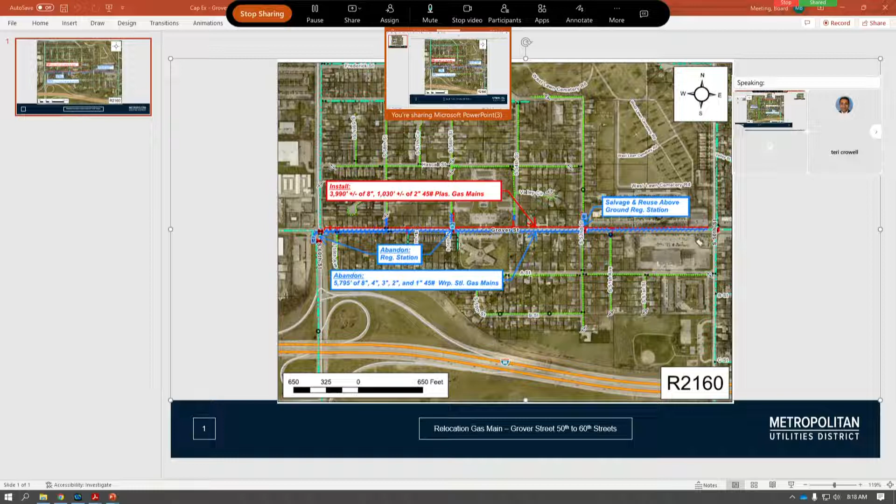The first item is item number 2, on page 2, for $811,800. It's to install 5,020 feet of 2- and 8-inch gas main in Grover Street from 50th to 60th Streets. This work is required to eliminate conflicts with proposed grading, paving, and sewer being done for a City of Omaha project. This work is not reimbursable since it is in public right-of-way. This steel gas main is 60 to 70 years old, and this work will be done by a district crew.

If you look at the picture, you'll see the green dashed lines. The work in this area is to relocate some of the gas meter sets outside so that we can do an uprate to eliminate this medium pressured area. The dashed green lines are where we will be bringing some meters outside. Once we have all those meters outside, we will be doing an uprate that will make that entire area uprated to a 45 PSI pressure.

The uprate will allow us to abandon 3 regulator stations. 2 of those are in conflict with the project itself, and that would save us approximately $250,000 instead of relocating it, by doing this uprate. This will eliminate future maintenance of the regulators, and it will also improve our overall reliability of the gas system out here. One of those regulators is an above-ground regulator station, which we will be recovering and salvaging for reuse at another time.

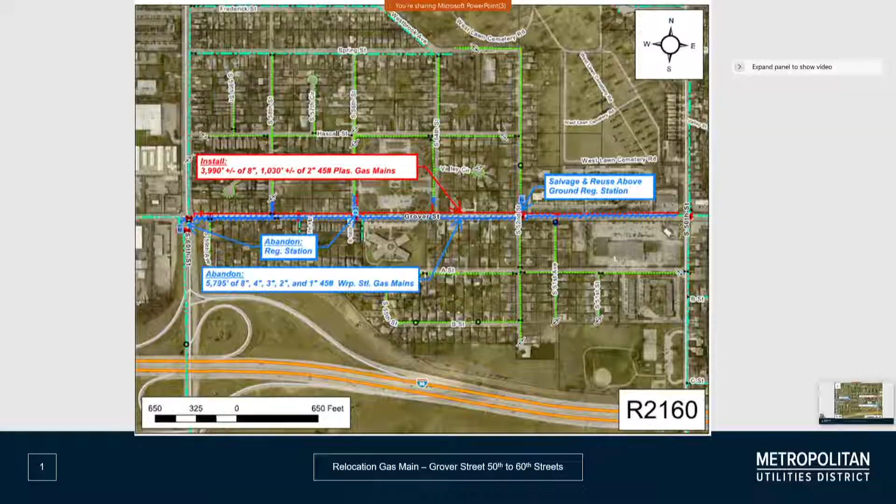The second item I'm going to cover is item number 3, also on page 2, for $104,700. The pilot project is to do a condition assessment of 2,500 feet of 6-inch water mains along 48th Avenue from Spring to Martha Streets, and 2,000 feet of 6-inch water mains along 46th Avenue from Bancroft to Frances Streets, now being shown on the screen.

This pilot project will use the HydraSnake electromagnetic inline inspection technology offered by Pipeline Inspection and Condition Analysis Corporation, or PICA. You've probably heard us talk about that before when we use the SeeSnake technology. It is to evaluate the condition of these water mains.

The assessment will assess a 6-inch cement-lined cast iron main. Both of these were installed in the 1950s. There have been 13 main breaks in these 2 streets, and the last one was in 2018.

This is the same technology as the 12-inch SeeSnake, but it's a smaller tool that is inserted through fire hydrants. That allows us to have less digging and shutdowns, and it results in a lower cost.

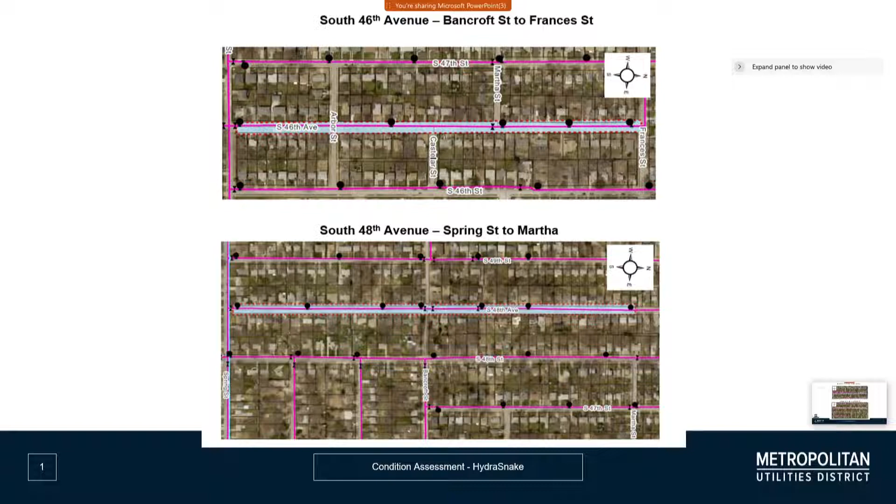This request includes the replacement of 4 obsolete fire hydrants for more reliable insertion and extraction of the tool. The proposed schedule will be in late July to shut down and modify the hydrants, launch and receive the inspection tool, and complete the inspection.

Each run will take about 6 hours. We have been communicating with the customers and will continue to communicate as we go through the project. Work will be done between 9 a.m. and 3 p.m. to minimize customer impacts.

It will take approximately 2 months for us to get an assessment report, and the repair will likely begin in the end of 2022 and the beginning of 2023 to reduce the risk of future main breaks.

Just for general purposes, it's about $23 per foot to do a HydraSnake inspection versus $378 per foot to do a replacement. That doesn't include the cost of where we'll go surgically repair different areas, but it does make a lot of sense for us to continue to do condition assessment and go fix the parts where we need to.

Gina, that sounds really like a great opportunity, great tool. You said 2 months before we get the conditional assessments or whatever. Correct. Are you going to come back to the board and tell us how that did? We do that usually. We can do that at any time, Director McGowan, but we'll also do it when we do our updates of our IR assessment. So if there's a desire for us to come back, we can do that. Absolutely, it's a pilot project.

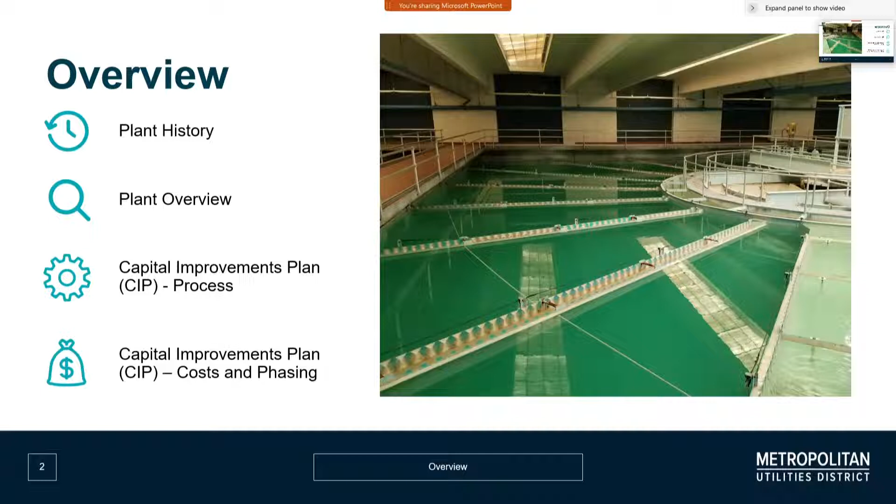So a brief overview, or I guess a brief agenda of what I'm going to talk about regarding Platte South. I'll give a plant history, a brief overview, and then the capital improvement plan process and some of the costs I'll share as well. Next slide, please.

So you see the arrow chart here gives a little plant history. So even though the Platte South is more than 50 years young, it was established a full 70 years after the Florence plant. In addition, after that construction and onlining of the plant itself, the arrow chart highlights some of the plant improvements which have taken place over the plant's current lifespan.

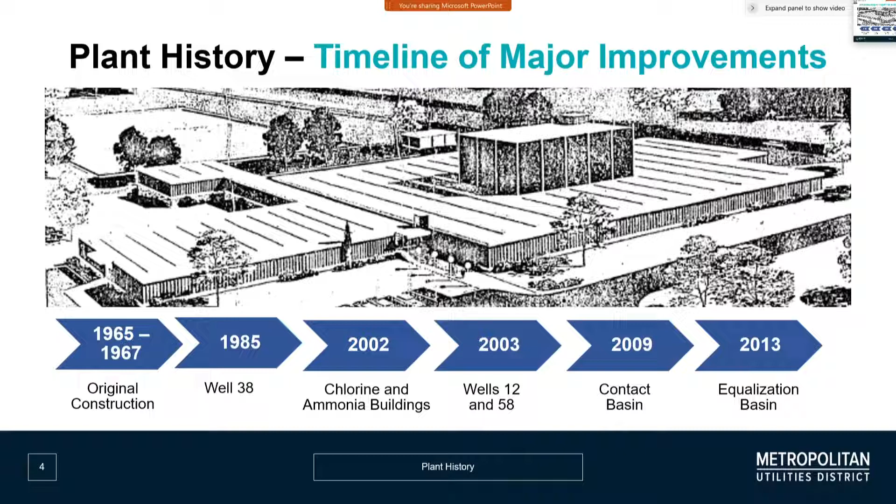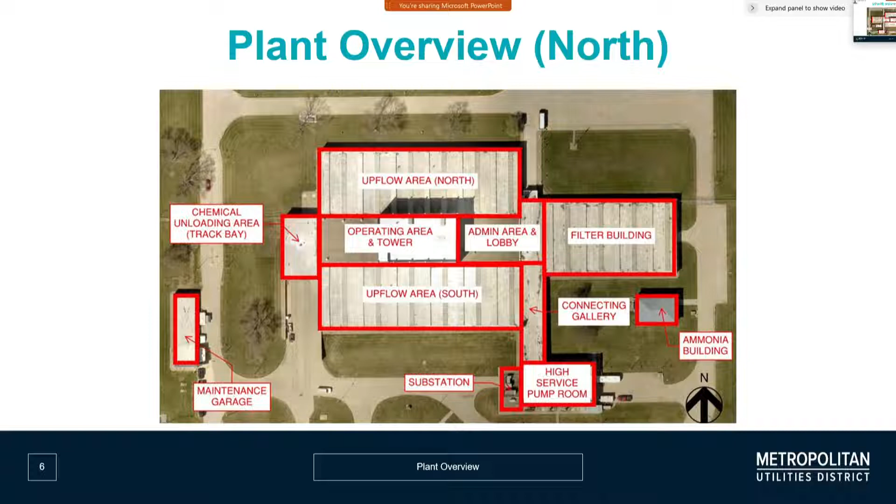So dividing the plant up in a couple of different overview or aerial slides here. The first is the plant overview north. The plant and wellfield consists of approximately 700 acres. The north portion of the plant, with exception of the ammonia building in this picture, are original to the 1960s build. Like the Platte West plant, the Platte South plant is contained under one roof.

So then on the next aerial view here, we can see the south portion of the plant, with exception of the clear well and then the small storage building on the right. Most of those are newer structures in that overview, many of which were related to recent regulatory improvements.

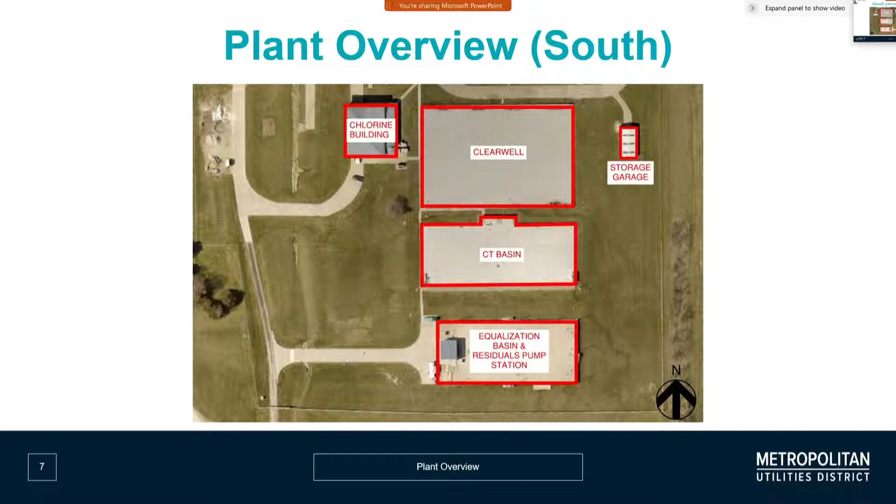So a brief overview of the capital improvements plan process, highlighting some of the evaluations performed. These are just some of the key aspects of it.

The plant was studied for any current or potential bottlenecks. We're exploring any low-hanging fruit for capacity improvements should the need arise.

We also performed a condition assessment, looking at all of the plant's components related to architectural, structural, mechanical, electrical, and process. That assessment was closely done with the plant maintenance staff, as well as our central maintenance division, and incorporated all the equipment history into those evaluations.

One thing to point out is we find, as we do these types of evaluations, that we have a very good maintenance team. We maintain our equipment very well and prolong its life for quite some time.

And kind of teeing up what was discussed in the previous comments from Mr. Doyle and Ms. Langle, even Jeff Skovanek, you're going to hear a lot of those things sprinkled throughout this presentation.

So we also evaluated future flood elevations and impacts of climate change during this study. The process also included any challenges related to the Safe Drinking Water Act and known upcoming EPA regulations.

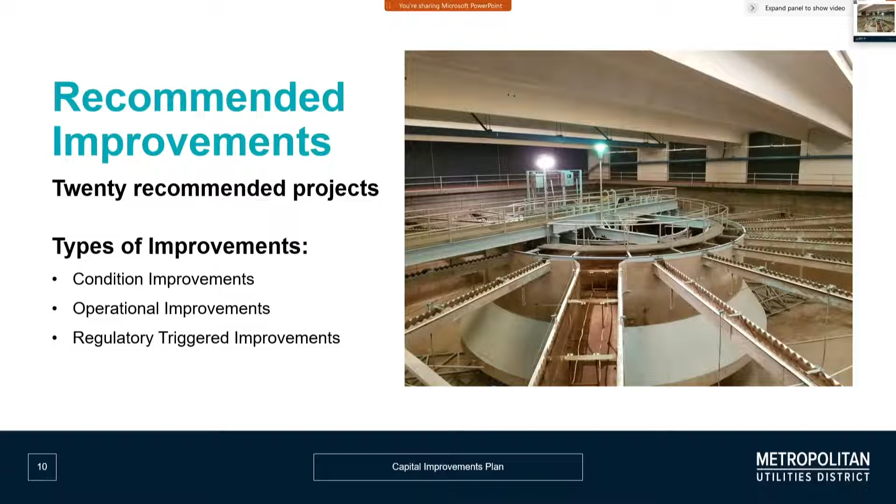So just a quick overview of the capital improvement costs. We've got a total of $136.3 million in 2022 dollars.

Probably the biggest note here, as I mentioned on the previous slide, is that the regulatory triggered improvements will only be initiated once the trigger condition is met.

So as you see the next 10 years, how those costs are spread out - timing of the projects is still being evaluated to meet the district's budgetary needs throughout the entire company. Many of the initial projects are related to condition assessment items critical to plant operation.

An example of that would be the plant's electrical, or the well field's electrical backbone and the electrical service to all the pumps in the well field.

Now I'd like to transition to a brief overview of the Water System Master Plan.

A brief agenda for the last portion of the presentation: a high-level overview of work completed, the prioritized CIP, and the next steps.

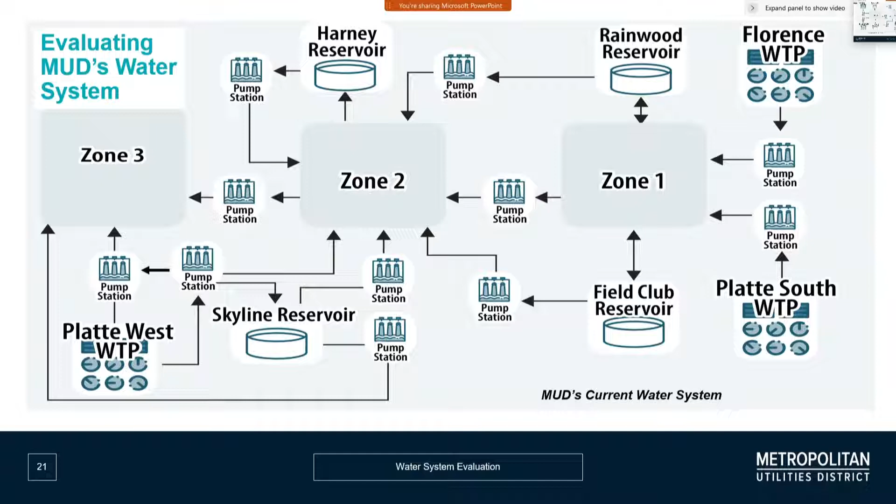So in this schematic, we're showing that the district operates a complex water system designed to deliver peak demand and adequate pressures. This complex system was evaluated using a hydraulic model to project where levels of service criteria would not be met by 2050 due to growing demands. In these areas, improvements would be needed to meet the level of service criteria. When I say level of service, we're establishing minimum pressures, fire flows, those types of things. We hit on the West Dodge pump station, and those types of improvements are what keeps that level of service available for our customers.

Just to touch on the optimization process, HDR subcontracted with a firm that specializes in optimization modeling. The firm's called WCS. That optimization modeling uses a cloud to allow them to run many more scenarios and alternatives than we could traditionally do with our brute force calculations. This allowed our collaborative team to identify a strategy that meets the level of service objectives at the lowest life cycle costs while considering potential future regional customers.

After completing the optimization modeling, we refined our capital improvements through workshops with our consultants. Then we prioritized those improvements, estimated timing for them, and identified triggers so that the plan can be adapted during implementation. So this is a lot of trigger-based improvements—we don't build it until we see the growth coming. Key capital improvements in this document include two storage reservoirs and pump stations out in the southwest and northwest fringes of the service area.

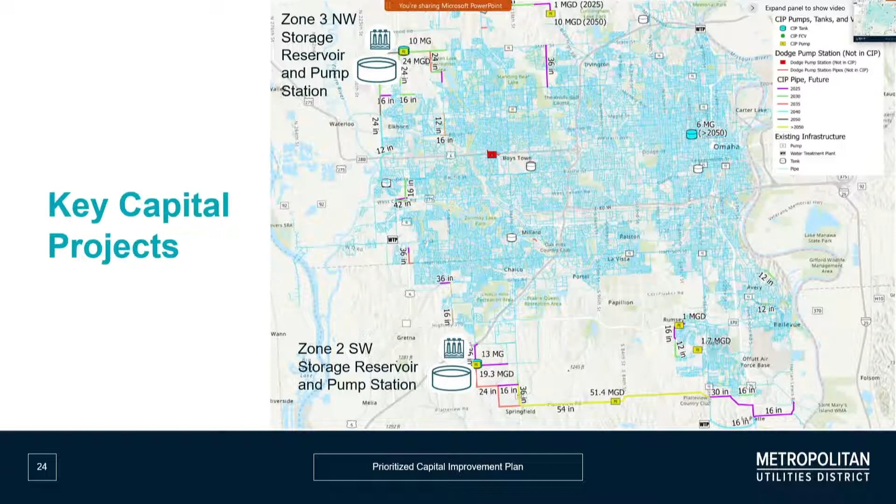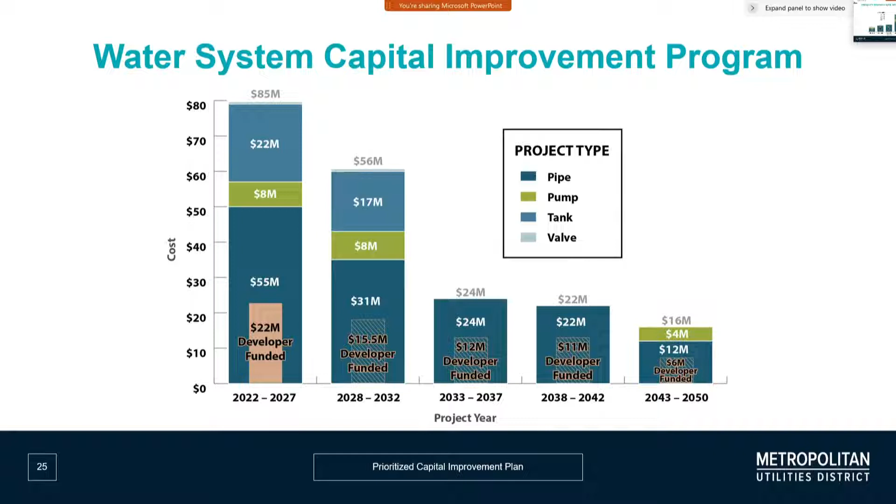So the next step is continuous improvement. I wanted to bullet point and highlight a few of the main things plucked out of the continuous improvements portion of the plan. We talk about peak demand management in Zone 3, which I think was teed up in previous comments—shifting demand from Monday, Wednesday, Friday at 6 a.m. to save the district and the ratepayers money. There's potential opportunity here with demand management by encouraging customers with automatic sprinklers.

We're talking about automatic sprinklers here, and I'd clarify—somebody made a very good comment that we don't want everybody to shift to Tuesday, Thursday, weekend. We want the odd numbered houses to do that. If we get cooperation in that, then we spread that demand over the entire week, still sell the same amount of water. Hopefully it's a win-win for the customers.

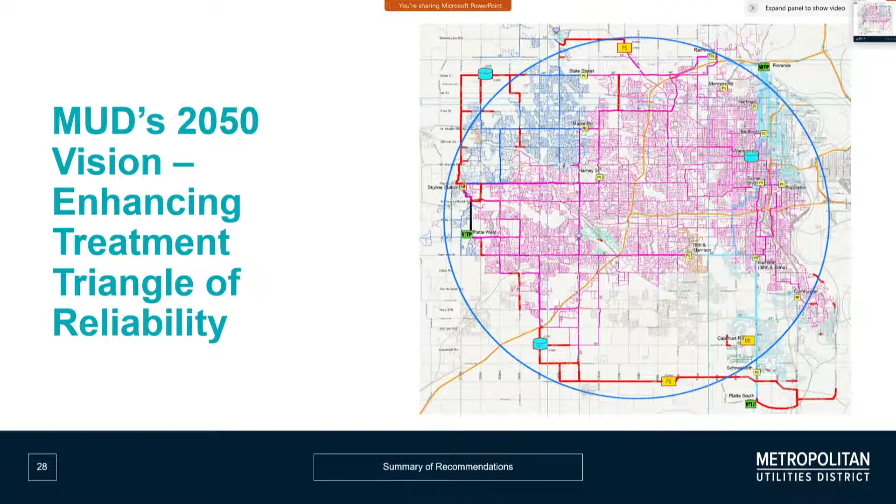So this is a good transition or segue into our potential partnership with Lincoln. I would like to wrap up and provide a brief update on our potential partnership with them.

A little bit of background: in 2019, HDR studied the Lincoln and district interconnection. Preliminary findings indicated that the district could supply this water and recommended the district complete our hydraulic model and incorporate future growth demand projections, which is kind of where we're at. That's what I'm here for today, is to present that update on where we are with that system master plan, and our hydraulic model was completed just earlier last year.

So the district treatment plant expansion would likely be needed based on what our model is telling us. And initially, the base demand from Lincoln would be 5 million gallons per day, with higher demands in the summer months.

An update from Lincoln's side: they're looking right now at a study, doing an internal study on what their second source of water is going to be. They're nearly ready to sign an agreement with a consultant to do that. In that request for proposals and scope of work, Lincoln's identified 5 alternatives for future water supply, and the district is included in 2 of those 5 alternatives. They're on a rapid, very aggressive schedule to have phase 1 completed by January 2023.

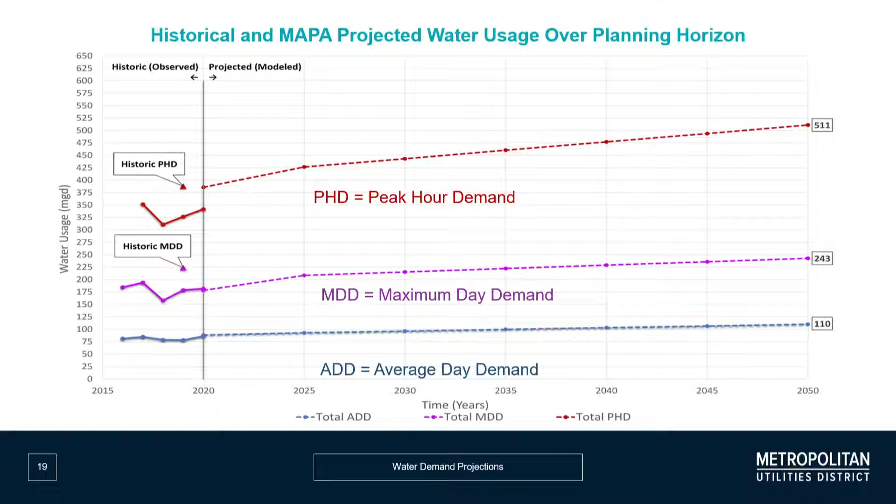I don't want customers calling saying they can't water their lawn, but if you look at that graph, it's amazing how much higher we have to design for that peak hour. That's expensive, a lot of our costs. I don't want to upset customers, but peak hour demand is a huge thing to meet. Yes, and it's great that you recognize that, because it hits like a freight train every Monday, Wednesday, and Friday during the hot summer.

This is Mark Doyle again. I'd add a few comments on managing customer behaviors. Every year that goes by, the minds of people are changing - you'll have a kindergartner now telling you to shut off the water. To manage that peak through customer behavior, Mike mentions the irrigation companies. We're going to work harder on that, maybe an incentive to change your sprinkler, not necessarily what day you're on. In a perfect world, if we had half of them running those days, we'd be golden. That's nirvana for us.

Yeah, and these are estimates. We're going to continue to watch because customer trends are not set in stone - they'll ebb and flow with their desires. We see that trending downward and we'll adjust as needed. Over time, managers of this utility and this board will have better information at the meter, which will be very helpful. We'll be able to proactively say, this 1,000 customers we probably could change. So this is a long-term discussion, and your points are valid. We don't want to design for that peak day come heck or high water.